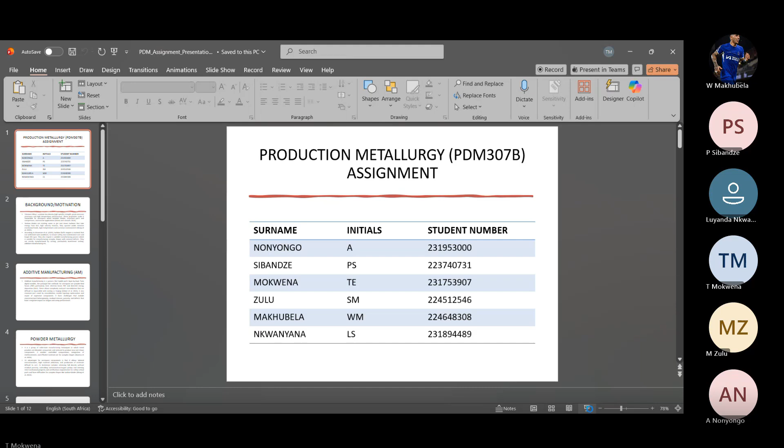Today, we will be presenting our production metallurgy assignment. The presentation focuses on the manufacturing of titanium turbine blades with a particular emphasis on comparing additive manufacturing and powder metallurgy. We will also explain why additive manufacturing, specifically laser powder bed fusion, is the most suitable method for producing lightweight titanium blades with internal cooling channels.

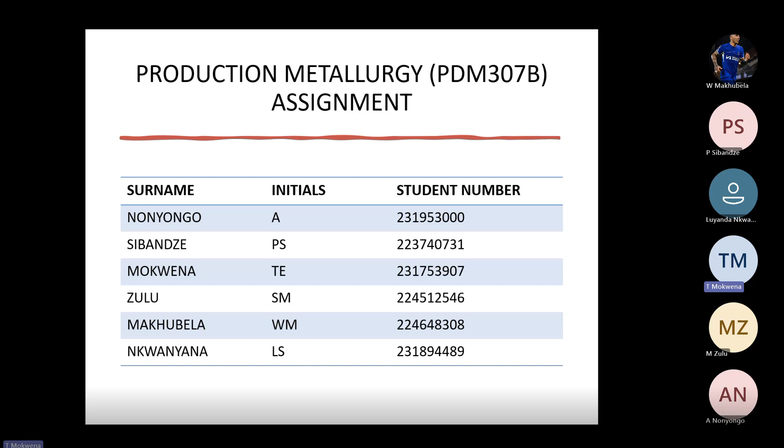In the background and motivation, titanium alloys combine low density, high specific strength, good corrosion resistance, and high temperature performance. These properties make it favorable for aerospace, which includes blades, structural parts, and compressors, and marine application.

Turbine blades are rotating vanes in gas and steam turbines that take energy from hot, high-velocity streams. They operate under extreme mechanical loads, high temperatures, and corrosive environments. According to Moverare et al. 2025, turbine shafts require a material that can withstand such conditions to ensure safety, low maintenance cost, and longer lifespan.

They also require a suitable manufacturing process, which is suitable for manufacturing complex shapes with minimal defects. They are mostly manufactured by casting, particularly investment casting, and additive manufacturing.

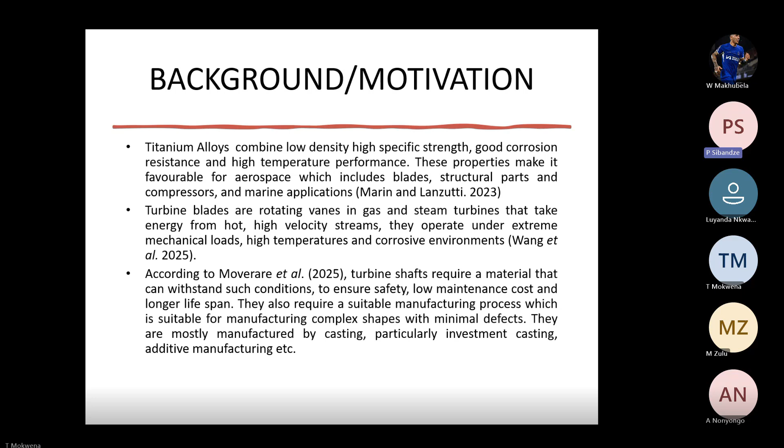Greetings, everyone. My name is Sibandze PS, and I'll be taking you through the main production processes that are being looked into under this assignment, which is powder metallurgy and additive manufacturing. We will start with additive manufacturing.

Additive manufacturing is a process that builds parts layer by layer from digital models. The principal additive manufacturing methods for aerospace are powder bed fusion, particularly laser and electron beam, and directed energy deposition. This allows complexity and part consolidation that are difficult or impossible with casting or forging. It also minimizes part count by consolidation, enables topology optimization and repair of expensive components.

It faces challenges that include microstructural heterogeneity, residual stresses, porosity, and defects that have a negative impact on fatigue and creep performance.

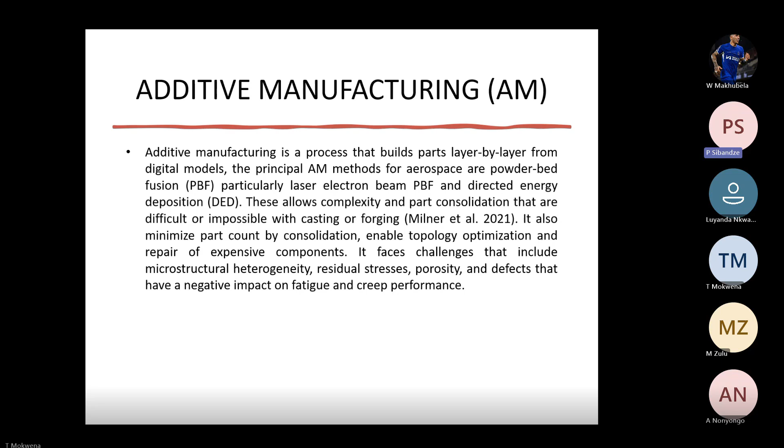Following now, we will look into powder metallurgy. It is a group of solid-state manufacturing techniques in which metal powders are blended, compacted, and sintered to produce near-net shape components. It enables controlled composition, integration of reinforcement, and efficient material use for complex shapes. Its advantages for aerospace components are that it allows tailored microstructures, high material utilization, and production of materials difficult to cast.

Its limits include achieving full density without residual porosity, controlling contamination or oxygen pickup, and meeting strict mechanical properties and certification requirements for safety critical parts, and it faces difficulties for complex shapes like turbine blades.

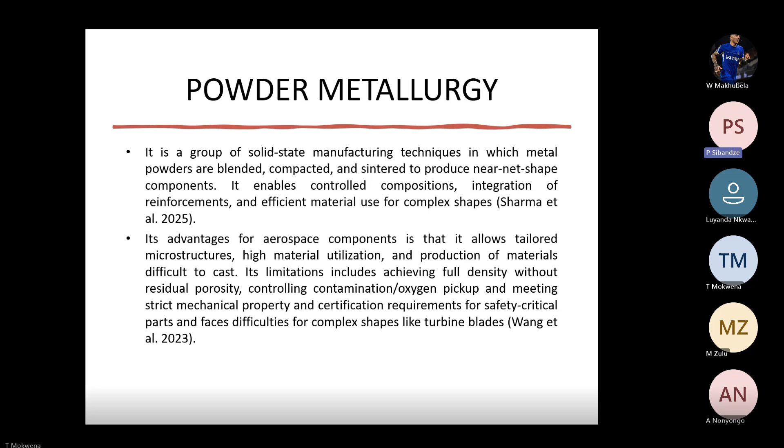To produce a lightweight titanium turbine blade with internal cooling channels, additive manufacturing, specifically laser powder bed fusion, is the most suitable method. This is because additive manufacturing can create complex internal passages that powder metallurgy cannot. It also offers high microstructural refinement, high density, and strong mechanical properties. Powder metallurgy requires tooling and cannot easily create hollow or intricate shapes.

Thus, additive manufacturing provides the best combination of design freedom, accuracy, and performance. Although powder metallurgy can produce near-net shaped parts, its geometric limitations and the need for post-processing make it less suitable for highly complex aerospace blades. Additive manufacturing is therefore justified due to its superior design freedom, high quality microstructures, and reduced need for tooling, which makes it cost efficient for low volume, high complexity aerospace components.

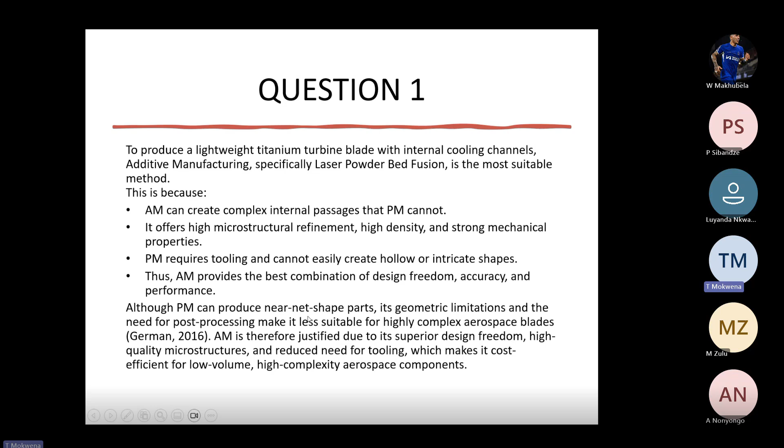Then after the build, the part is subjected to post-processing, which includes heat treatment for stress relief, hot isostatic pressing to close residual porosity, surface finishing to ensure aerodynamic smoothness, and precision machining for dimensional accuracy. The final inspection involves non-destructive evaluation and dimensional verification to ensure compliance with aerospace specifications.

Next page. Next page, please.

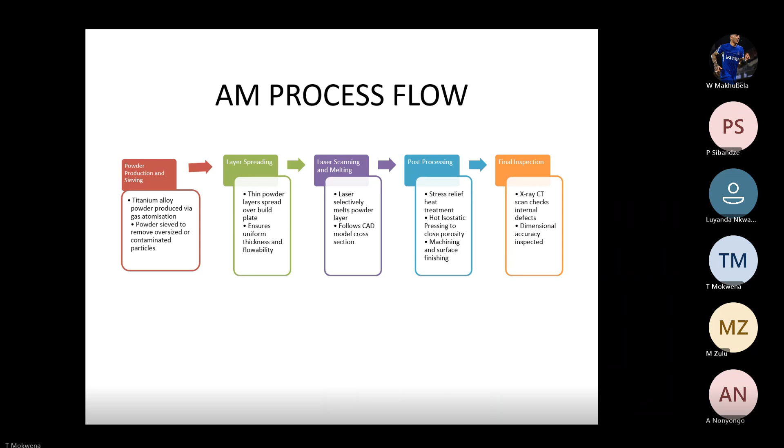I will also take you through additive manufacturing defects and parameter control, which are preventative techniques. Additive manufacturing experiences defects such as porosity, cracking, and distortion. Porosity occurs from insufficient melting, unstable melt pools, or trapped gases, which weakens fatigue resistance. Cracking is caused by steep thermal gradients, typically in titanium alloy printing, while distortion results from residual stress accumulation during rapid melting and cooling.

Then the parameter control, which are preventative techniques, include optimizing energy density, increasing preheating to reduce thermal gradient, ensuring consistent powder quality, and incorporating effective support structures. These measures directly target the source of defects and therefore enhance component reliability.